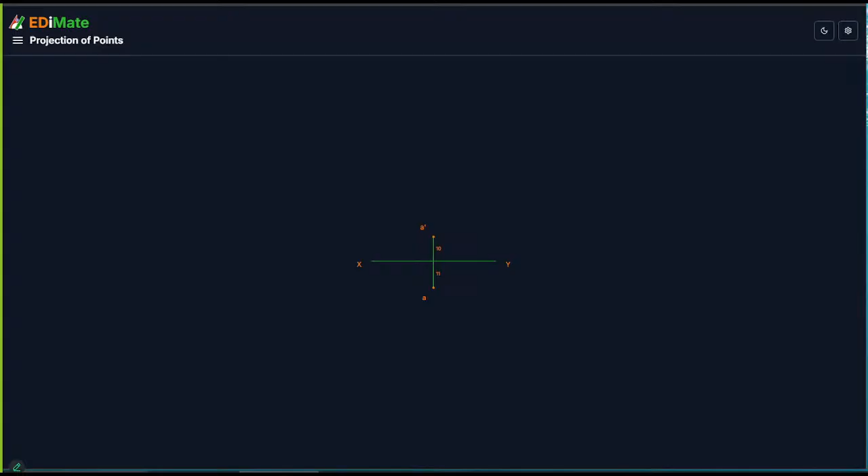There are, of course, some things which I'm yet to add. It's still a work in progress. Let us start with points, I think that would be the right place to start. You can see this is the projection of points. There is an XY line, and the front and top view of a point A has been shown here.

When we click on the top right side, which is a setting button, it will open a side panel which shows the controls with which we can change the values for this view. Suppose we want to change its distance from HP, we just have to slide this slider, and you can see in real time in the graphical solution the front view rising above the XY line.

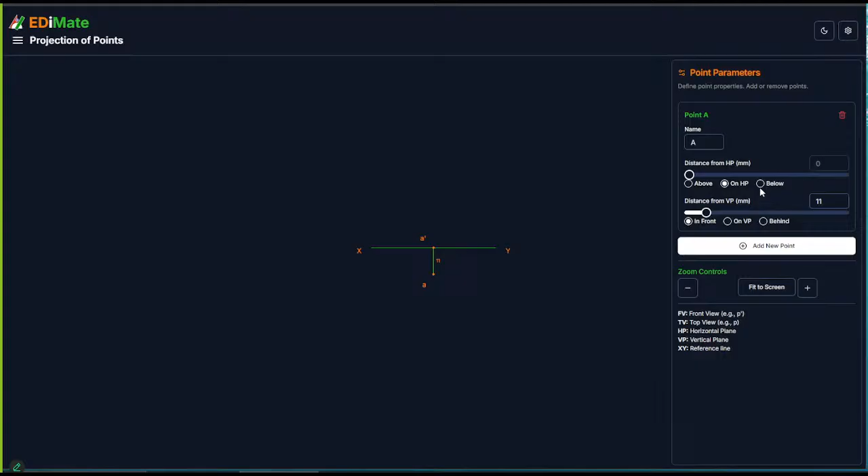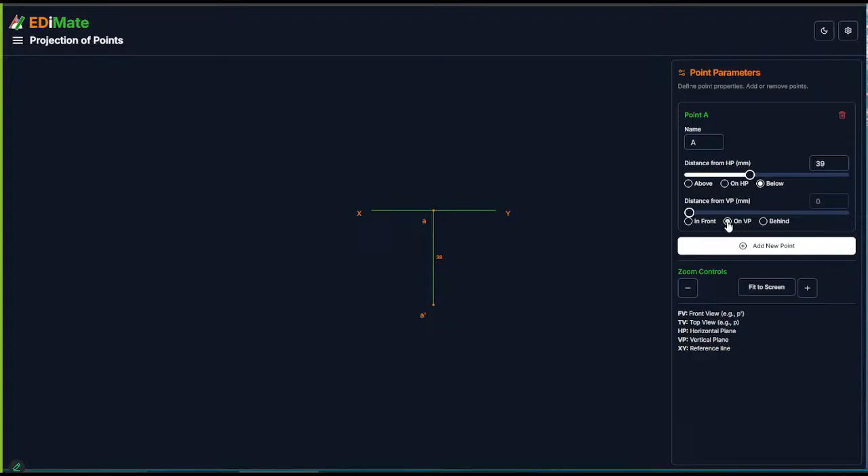If you want the point to be on HP, you can just click on this point and see the change happen instantaneously in the diagram. You can also place the point below the HP, at whatever distance you want. Same way, there is another slider which helps change the distance from VP. It can be in front, behind, or on VP, and all these changes we can do.

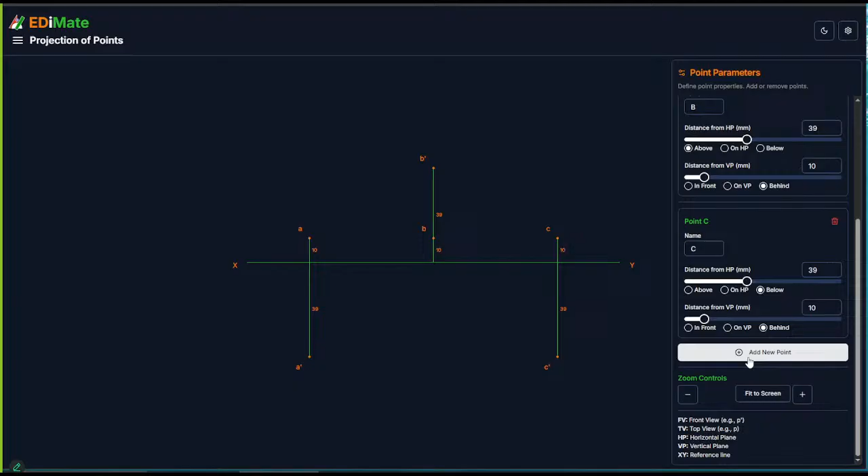If we want to compare the points side by side, we have an option here to add extra points. You can see another extra point has been added here, and I can keep adding points. Each point will appear with a different name - first point is A, second point B, third point C, and so on. I can keep changing the quadrants where the point is located and checking how any change in these dimensions will affect the point.

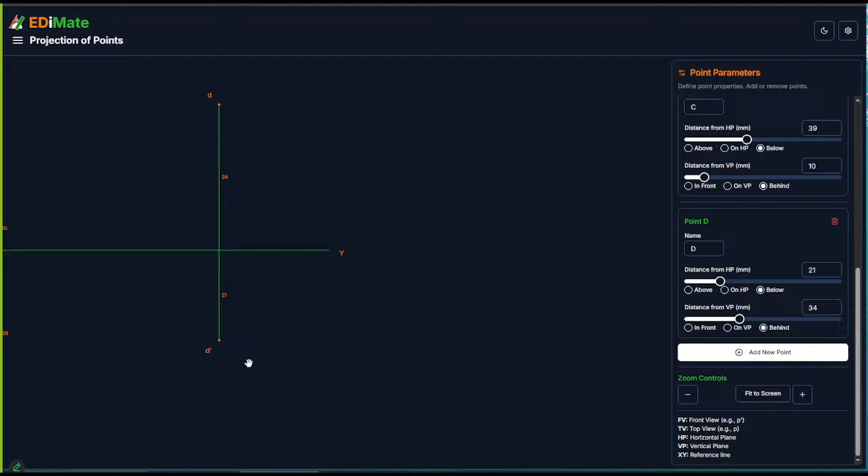So this is what we have here in points. At the same time, we have options here for zooming in and zooming out. If we click on the plus sign, we can zoom in and check one particular point in more detail. We can move this point aside and go around and check out all these points.

This is how the app has been designed. After the points, we have projection of lines. Projection of lines is where students feel maximum difficulty because there are a lot of different terminology to be used here. So in order to help them identify the different objects and lines, there is a click button pop-up based feature here.

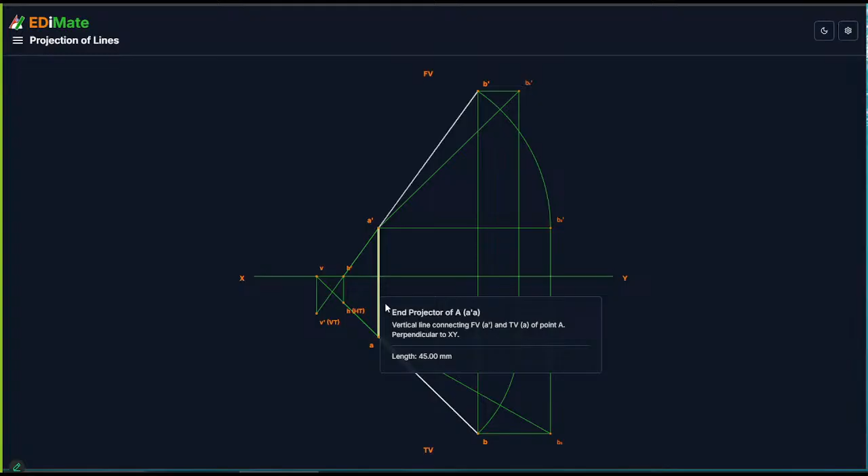When they click on a particular line they want to learn about, the line gets highlighted and a pop-up appears showing what that line is. First it shows the name of the line and how it is represented, B dash B, you can see, along with a short description of what that line is. It will also show the length of that line after it has been drawn.

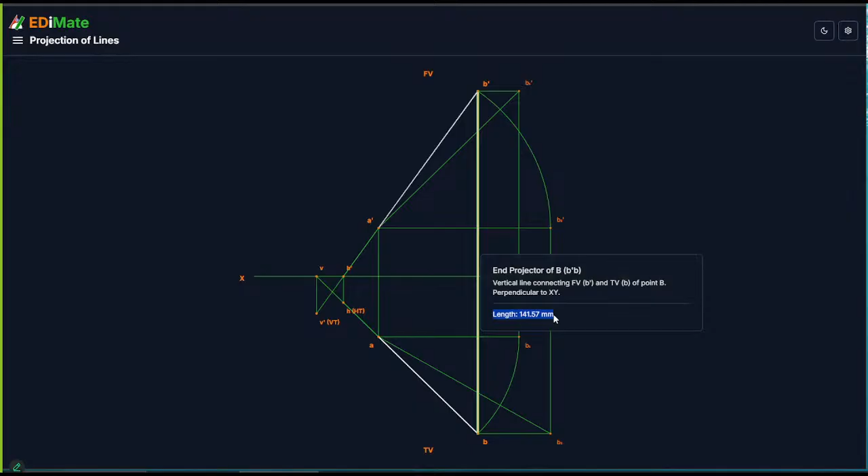This information can be used by the educators, the teachers, the lecturers who are giving assignments to students. Once they give a question with a different length and angle, the students will be able to draw it, and the teacher will be able to verify whether the diagram is correct by just checking a particular length.

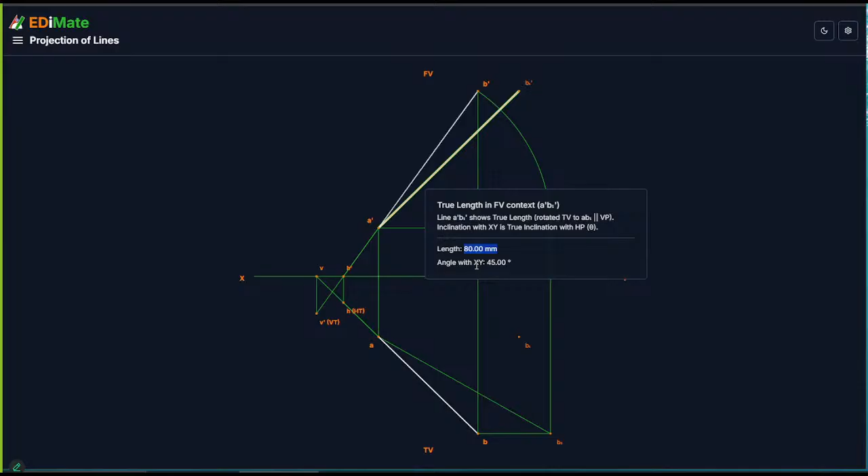It can measure all the lengths: the end projector first, end projector second, the front, the final front view, the final top view, the temporary top view at true inclination, and the temporary front view at true inclination. For all these points, pop-ups have been added which the student can use to understand what it is, what length it is, at what angle it is, and so on.

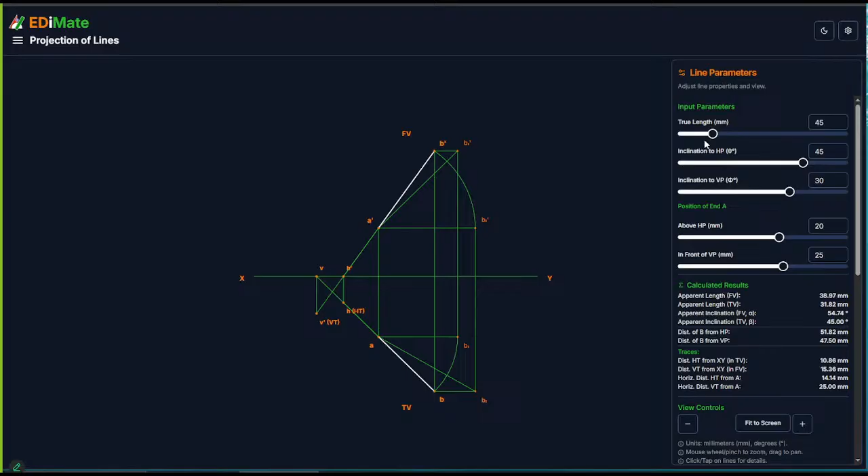If he clicks on the setting button on the top right, he will get the option to change the values. Right now I'm changing the true length, and you can see the changes happening in real time on the screen.

As soon as that happens, as soon as I'm done doing that, I just have to give it a small time and it will zoom back to show the complete diagram on the screen. So this is how it has been designed.

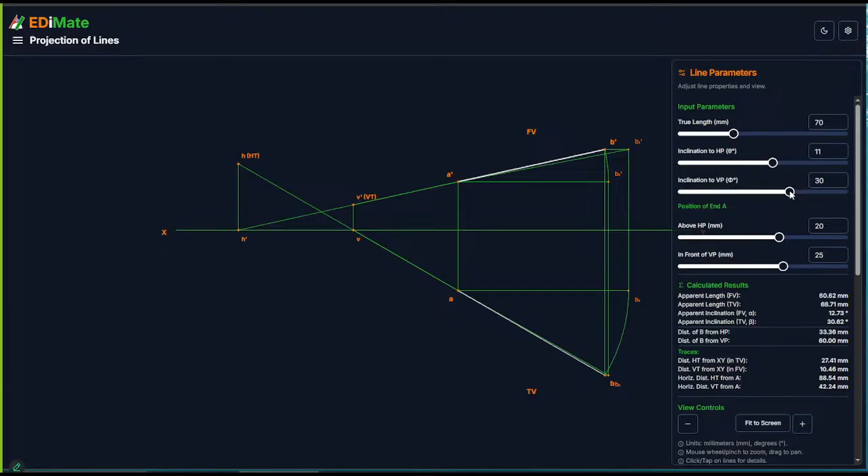You can also check the angle of the front view, the angle of inclination with HP, and it will zoom back to show the complete image. You can also change the angle with VP.

At any point, if the angle crosses a particular value and the sum of those angles becomes invalid, an error comes up at the top telling us that these particular angles are not possible. So the error handling also has been taken care of.

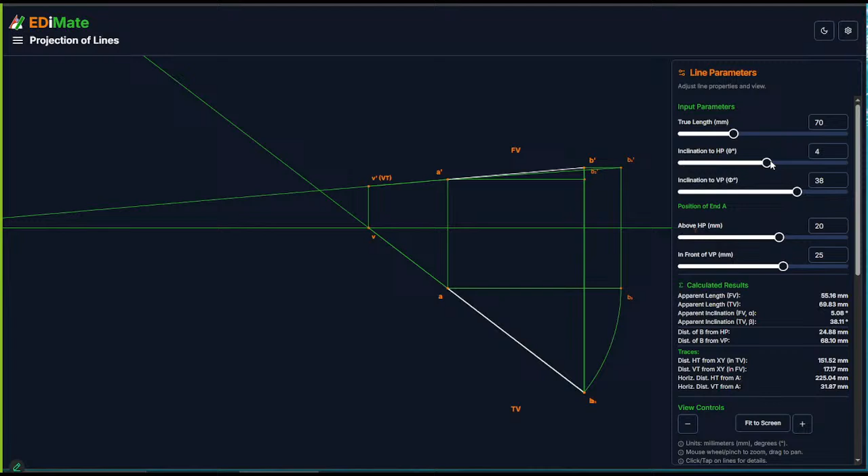This will enable a lecturer to give different values of problems for each student uniquely. Earlier, what used to happen is we just used to give a single problem with the same inputs for all the students, and one student used to solve it while all others would just copy paste it. So by doing this, majority of the students will not learn the subject.

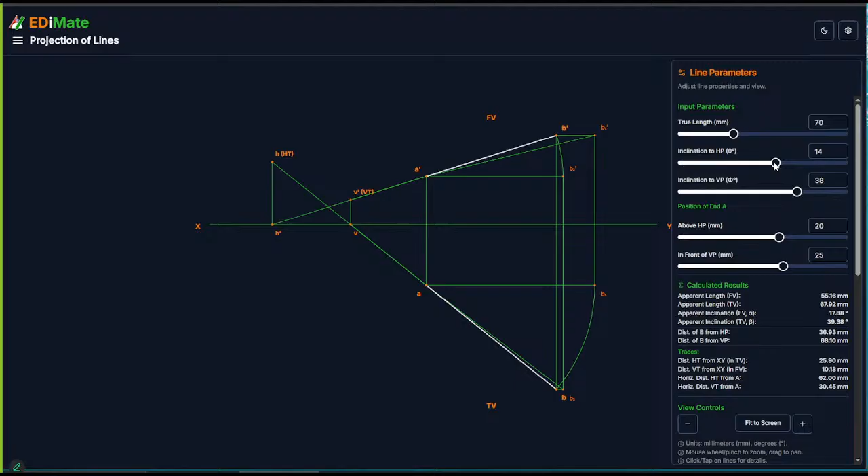So this app, I think, will be helpful to the lecturers in seeing a lot of different variations of the problems. Once the lecturer has so many variations, the students will be discouraged from copying stuff from others, and they will be more encouraged, more inclined towards learning it themselves.

Because only when they have understood it and learnt it will they be able to solve this problem, and only then will they be able to correctly get the value of the answers. So this is the thing.

Now, in projection of lines, we have solved only one particular scenario wherein the inclination with HP and VP are given. So we are trying to improve the application in such a way that it will be able to accept any of the five variables - it could be inclination with HP as it is right now, it could be the final front view length and final top view length, and it could be many other things like that. So I think this is what we have.

So can you share your opinion about this? Have you taught this subject earlier, the engineering graphics? Yes, yes.

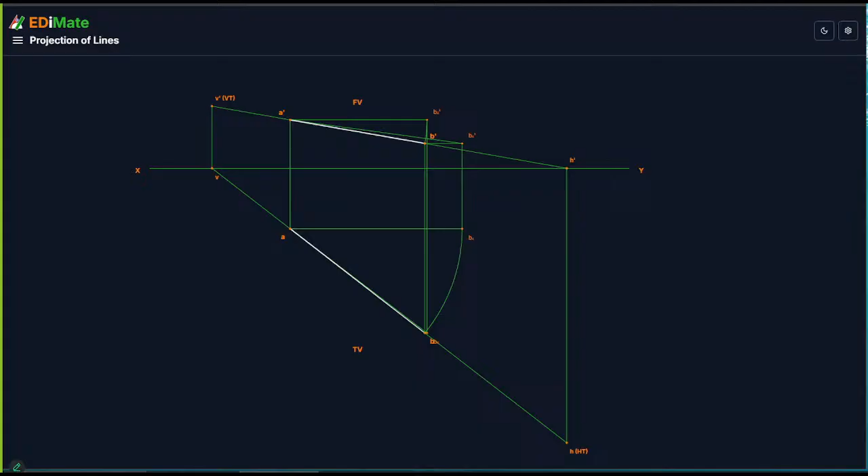Now, actually, in this case, at least give one example with the dimensions and angles. Give the dimension and angle and solve one problem. You want the dimensions to appear on the screen, or?

Yes. And first you should show them how they do it on the drawing board. Okay, meaning step by step - first what is to be drawn, next what is to be drawn. First show on the drawing board how to do it, then this application.

I didn't understand your question, sir. See, earlier when AutoCAD was not there, people physically drew it on the drawing board, on a drawing sheet, no? Yes, sir. That engineering drawing practice was stopped.

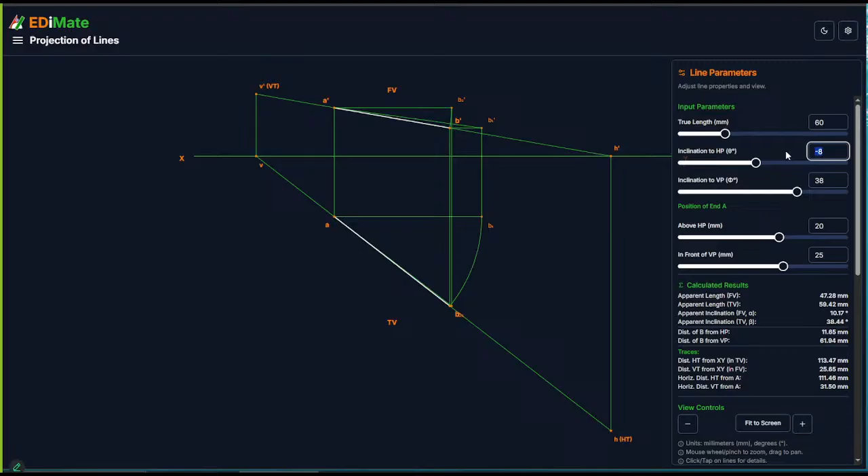And then this AutoCAD has come. So first, how to do that - what is that angle and size? Give the angle, size, both angles and the size of the front view on the vertical plane. Then how to do it? The first figure, whatever is given, that one you give it with the angles and all that.

So one solves the example with the angles and size. Actually, the solution is happening in real time. Now, whatever values you are changing, it will appear on the screen. That's what you are doing.

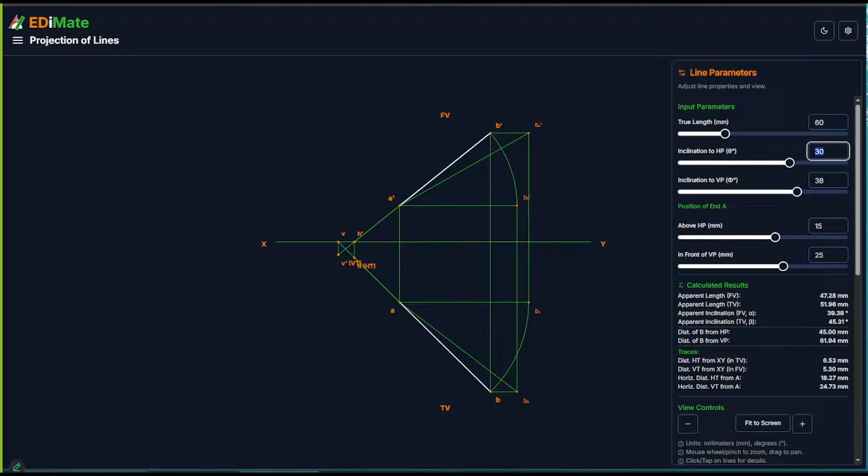One problem, sir, at least you solve it. Okay, let's take an example. The length is 100 mm, sir. Inclination with HP, let us say it is 30 degrees, and inclination with VP is 45 degrees. The distance of a point A from HP, let us say it is 10 mm, and distance of the same point from VP, let us say it is 25 mm. So these are the 5 inputs that will be given to the student in the question.

Now, as soon as the student fills these values here, the solution to that problem will instantaneously appear on the screen. Okay, that I agree. But at least how to draw this curve? How to draw these curves? Yeah, those things we have to add.

So first the plan fundamental - this is quite useful for people who already know the subject. Suppose when somebody is starting the drawing practice, who doesn't know what is engineering drawing, engineering graphics - for such problems, we have our YouTube channel, sir, on which in detail we have explained everything.

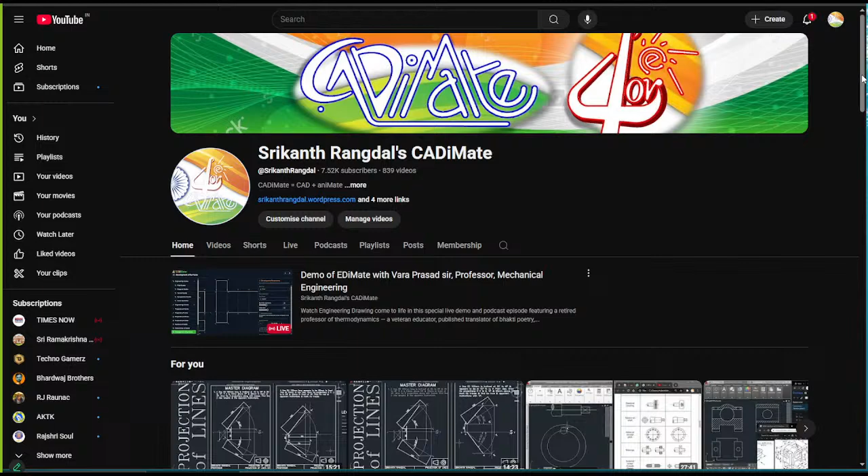Okay, this is the YouTube channel, and most of them have been solved by using AutoCAD. Initially I tried to solve it using engineering drawing manual board also, but there are very few on that because I didn't have a good quality camera with me. So there are very few of that type, but a lot of problems have been solved in AutoCAD.

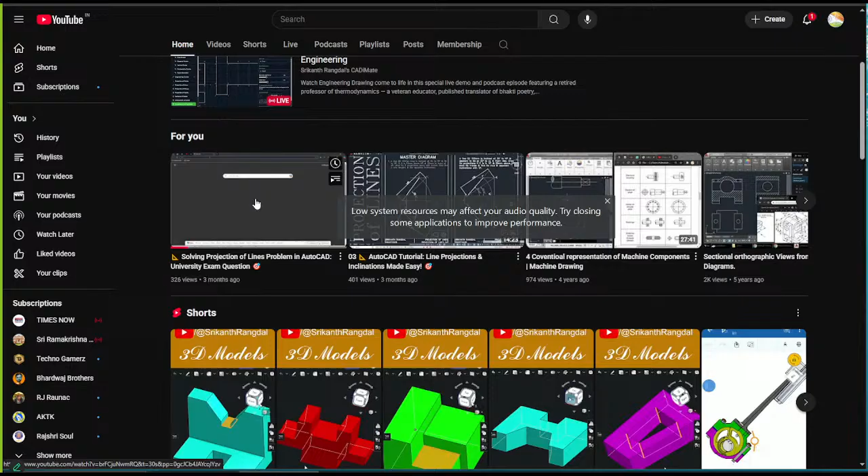This is a sort of practice by changing the angles and the size. So with this they can learn how to draw, what are the steps to complete the diagram, and the tools to be used for completing the diagram. And by coming here, they will be able to check how, by varying what value, what thing will change in the diagram.

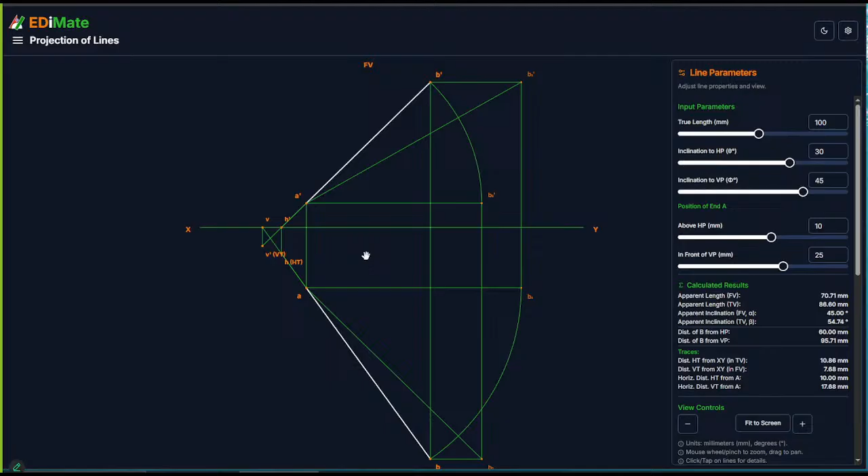Okay, that can be mentioned in your talk - you can say how to do it manually is given in so and so place. Yes sir, so those tabs will be added, like for example for engineering scales, there's a page added for videos also.

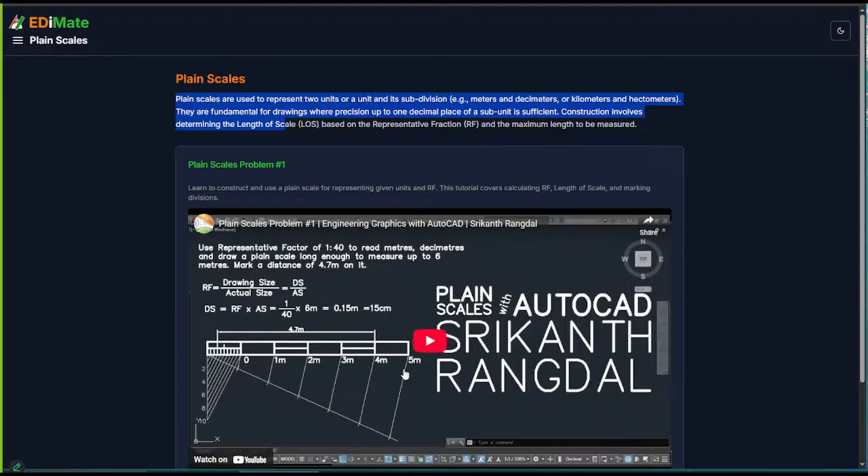It will take some time to load, sir. So this is the page - engineering scales, a brief explanation about what it is, and there is a video link. So when the student clicks on it, the video starts playing, showing how the scale looks. So these things, I think, will be helpful to students who don't know anything from scratch.

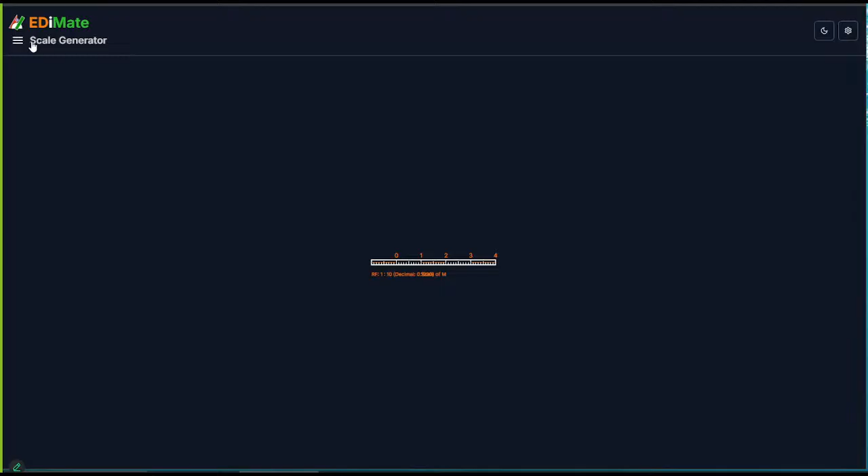And once they know enough, they can come to this simulator and play around with it to check how different values are affecting the diagram. Okay, understood.

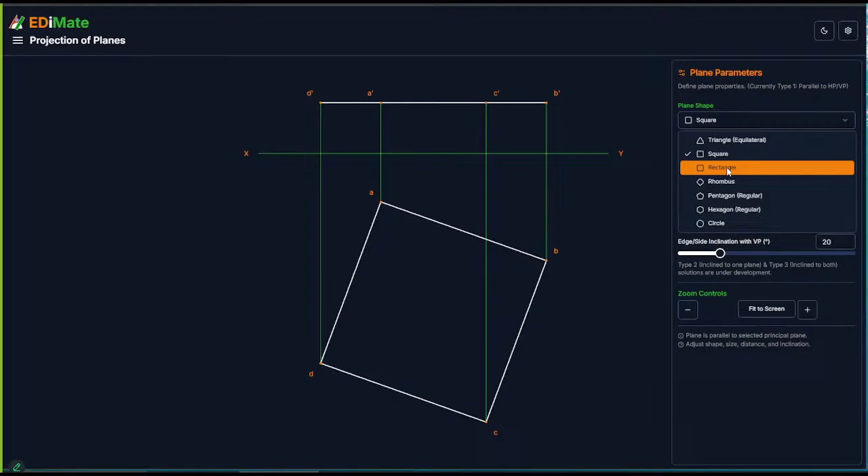So we also have projection of planes. In the planes, again, they can change the length, they can change the distance of the front view, they can rotate the top views at what angle they want, and accordingly the front view and top view both are going to show the changes. They can also choose different diagrams like rectangle with different length, width, and so on - rhombus, pentagon, hexagon, circle. So all these different types of planes they can select and check out.

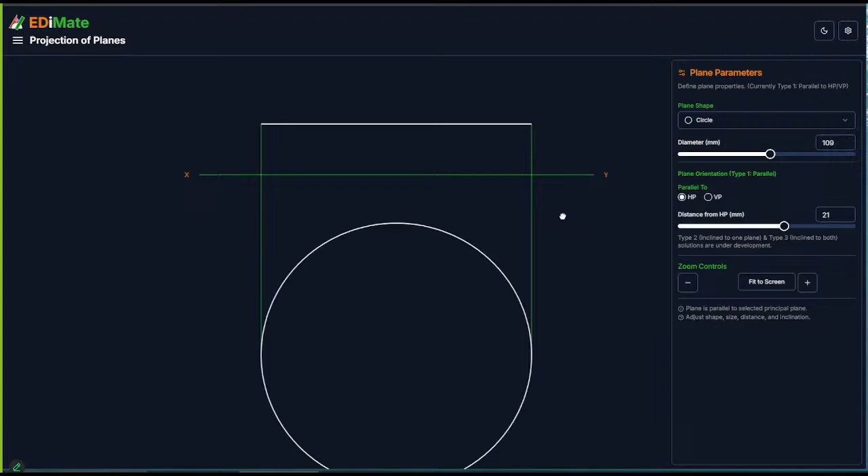The two-step problem, we are still working on it. The logic required for that is a bit complicated, we are still trying to find a solution to that.

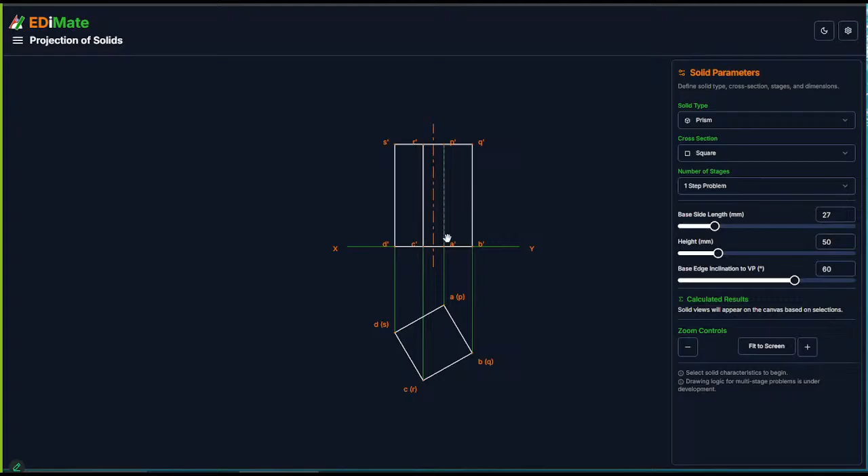Then coming over to solids, here again we have different types of solids listed in the first option. The students can play around with the base length, the height of the prism, and they can also change the rotation angle of the base to whatever angle they want. And in real time, they'll be able to see which line remains hidden and which line remains visible.

They can also choose different shapes. We have pentagon, hexagon, and all other shapes available.

So this is working perfectly for the first position, wherein the solid is resting with its base on HP. For inclination, we are still working on that logic. When that is obtained, we may add that as well to this.

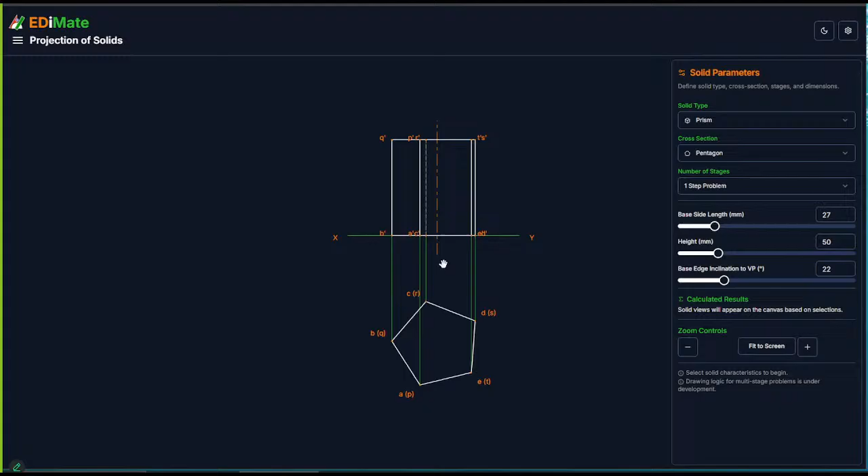Sections of solids was the toughest, I would say, for developing this, because it involves generating the sectional top view also. We have still not figured out how to get the true shape of the section, but most of the other things we are able to get.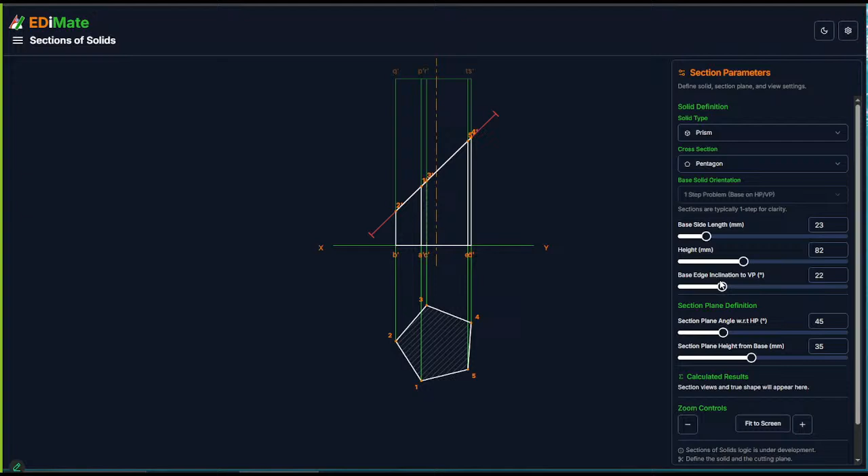So we can adjust the base length, height of the prism, and the inclination of the base. Then for the section plane, we can adjust the angle at which it is cut.

The plane may cut the top and bottom also together. Then we can adjust the height of this section plane as well. And in real time, you can see the changes are taking place. It's after all the changes are made.

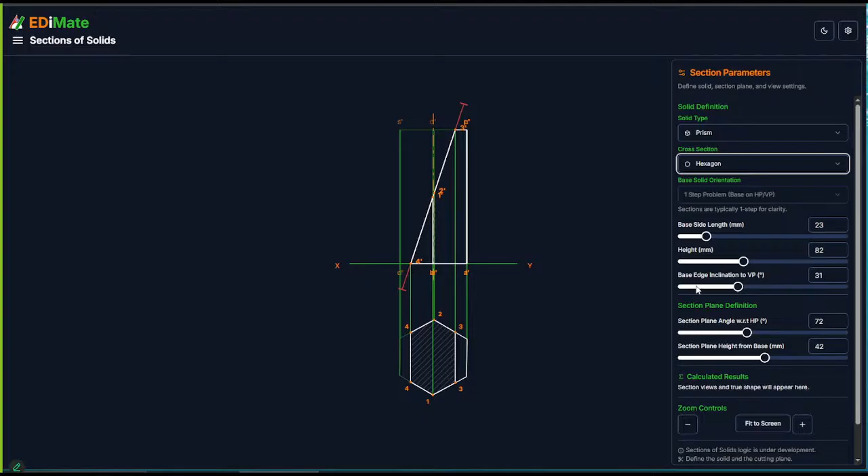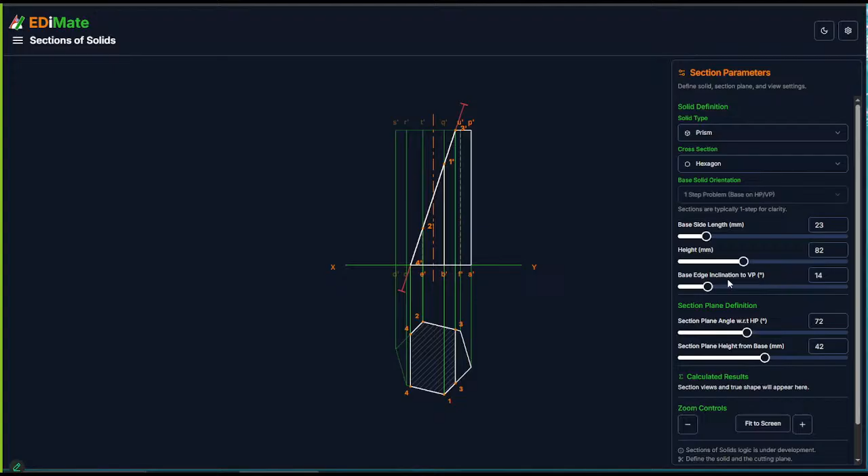So while teaching the subject, students at most can solve one or two problems in the class. And yes, with this limited number of problems that they solve, they will not be able to get a complete idea about how the figure changes if the values are different. So with this application, they will be able to get that idea completely.

So for any change, are you giving the values there? For sections of solids, we have not added it, sir. In projection of lines, you must have seen, we get the values - we get the lengths, we get the angles. All these are possible for lines. For this, we are yet to add.

Here whatever you have shown is when the section is there and hatching is given here. Yes, we are showing it. But at what angle it is cutting and all that, that is not there.

Presently here, we have not shown it on the screen, but when this angle, say I'm changing it to 30 degrees, it will reflect here on the screen. We just need to show it graphically here. That is something we are still working on, maybe on the keyboard it must be working.

Yeah, they can enter it from the keyboard. If they click here, they will be able to enter with the keyboard. They can also slide it continuously, and the angle will keep changing.

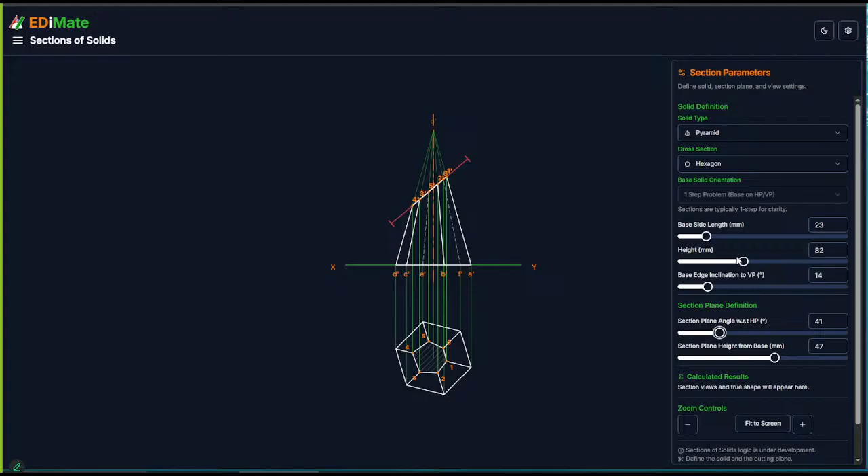That's about the sections of solids. Intersection, I'm still working on it, sir. I'm yet to figure out how to build the logic for it.

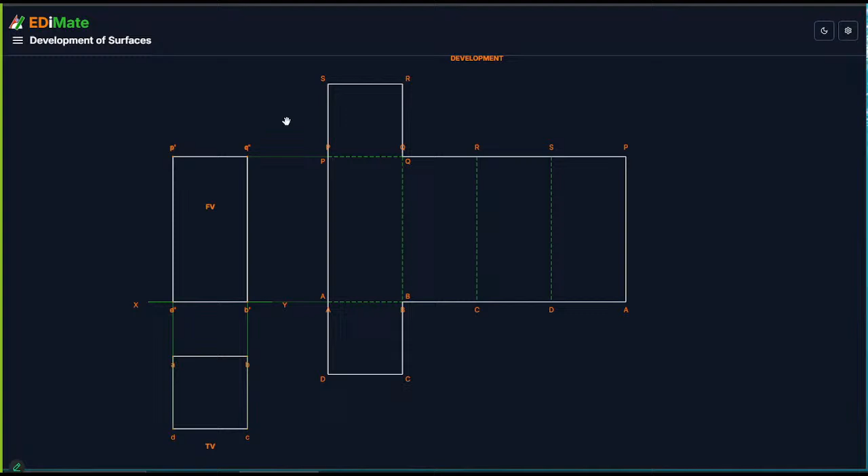And for development of surfaces, we were able to get only for prism as of now. Different shapes, whatever we can choose, they will appear, and complete prisms, they'll be able to open up.

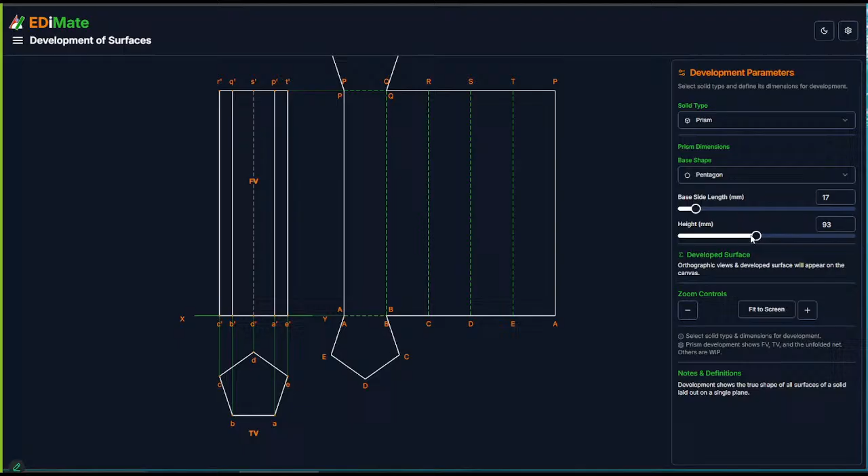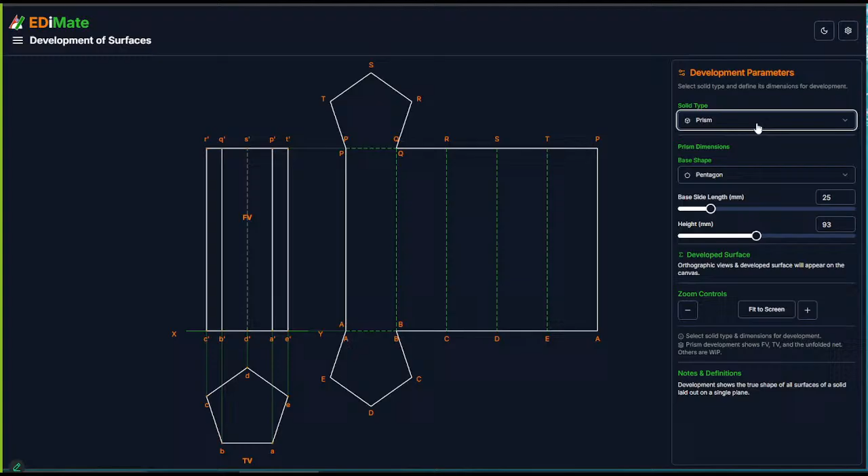Again, we can change the base side length, height - all these parameters they can change, and in real time, we can see the changes are getting affected in the diagram. So we are still working on taking a section of this, and also on other options like pyramid and other stuff. So once that is also done, I think development will also be a good topic.

So presently, what is the syllabus presently in engineering colleges? Not sure, sir.

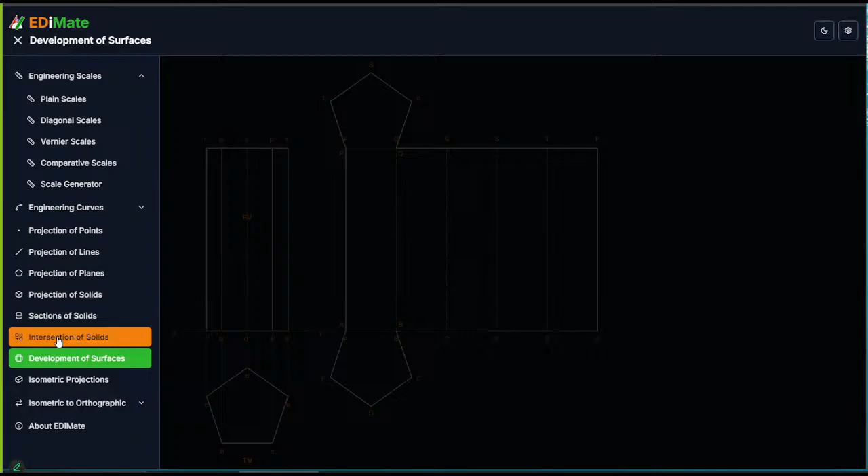I think intersection of solids is not there anyway because recently, normal drawing is stopped and AutoCAD has been started. Yes, sir. In that, I think in AutoCAD also I have seen some files - only they are telling some lines and planes. Not much they are showing. Very simple problems.

Actually, there were very difficult problems in the actual engineering graphics. But now, whatever they are teaching - when I left some 4 or 5 years back, I've seen only very, very small plane or a rectangle, something like that, circle like that. Yeah, there is a reason for it - small things. So again, the same thing.

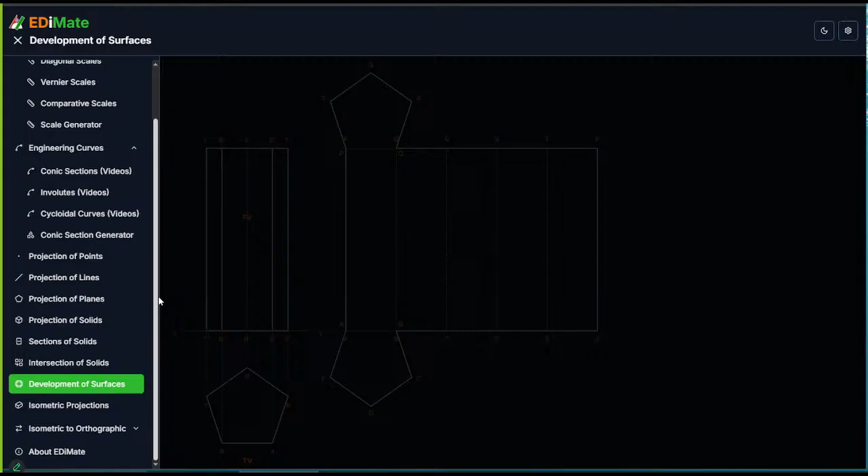That is again one of the other reasons why I thought of building this app. The students get very limited time in the lab, and in that time, they not only have to learn this software and AutoCAD, but computers may be less also - they have to learn about computers, then they have to learn how using the computers they have to solve the problems.

So many of the students - actually, the introduction of AutoCAD has become fast. I think unnecessarily they have introduced it, took up a lot of time, stopping the actual manual practice of graphics. But sir, if you see from an industry point of view, the software knowledge has become very essential.

This is something which cannot be paused, yes. But nowadays, this is the main disadvantage as well - yes, this is the main thing, the disadvantage now. So I think this app will connect to a more variety of problems in less amount of time. That is the one thing where it can help.

This is okay. So, and I think, sir, anything else you made?

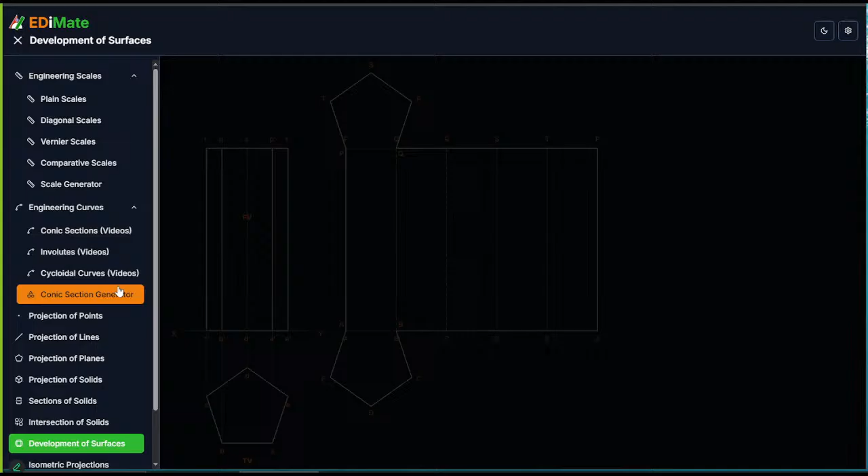Right now I'm working on this app only, but there's a lot of other work I had done when I was teaching. In this particular app, I think I haven't shown you this one. Let me show this and we can talk about other stuff.

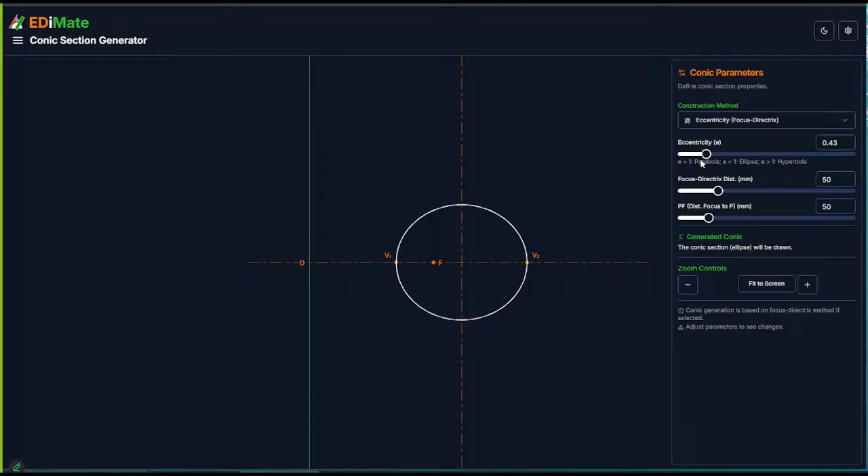So this is an ellipse, and when we start changing the eccentricity value, it stays an ellipse. When the eccentricity reaches 1, it becomes a parabola, and when it crosses 1 further, it becomes a hyperbola.

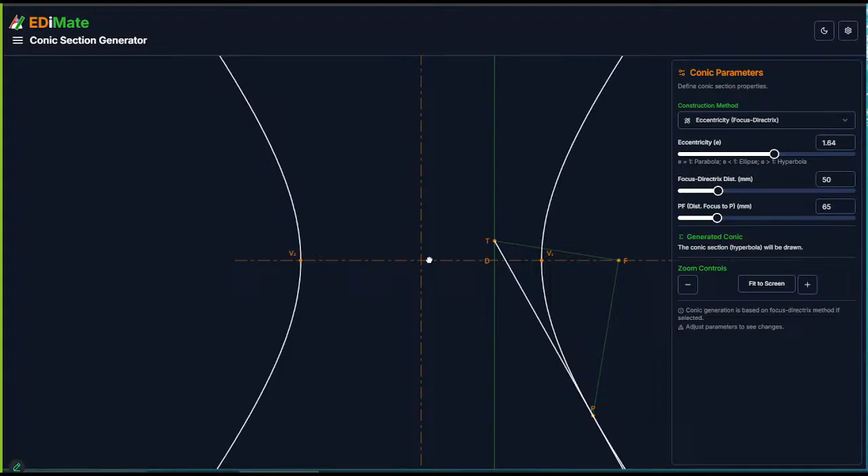And for the tangent value, when we adjust the distance of point P from the focus, see how the tangent is formed. So for ellipse also, they can see the tangent formed at different places, at different distances.

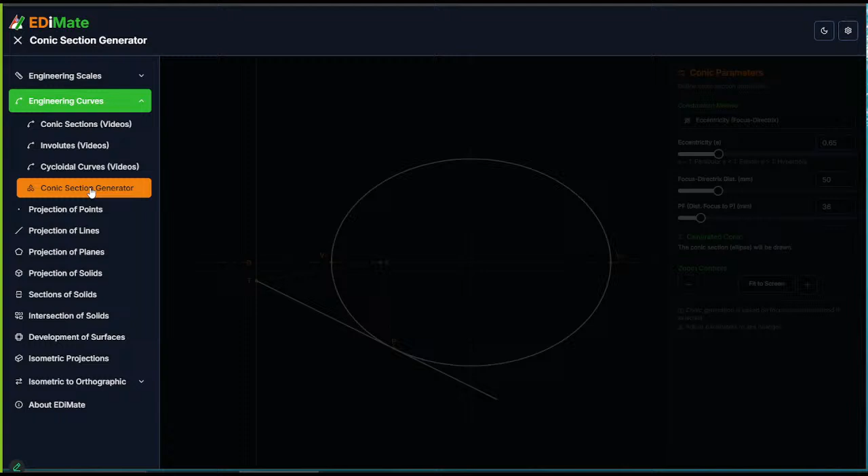For the conics and other stuff, I mean for cycloids and involutes, we are still working. There was a very good code I had.

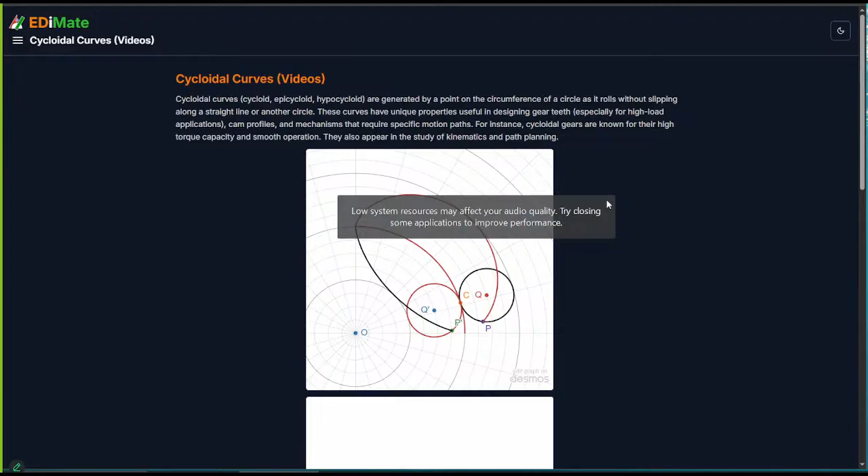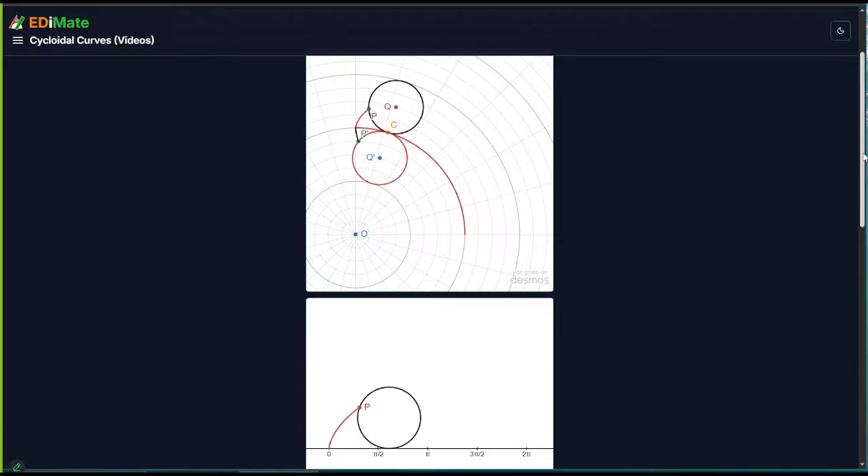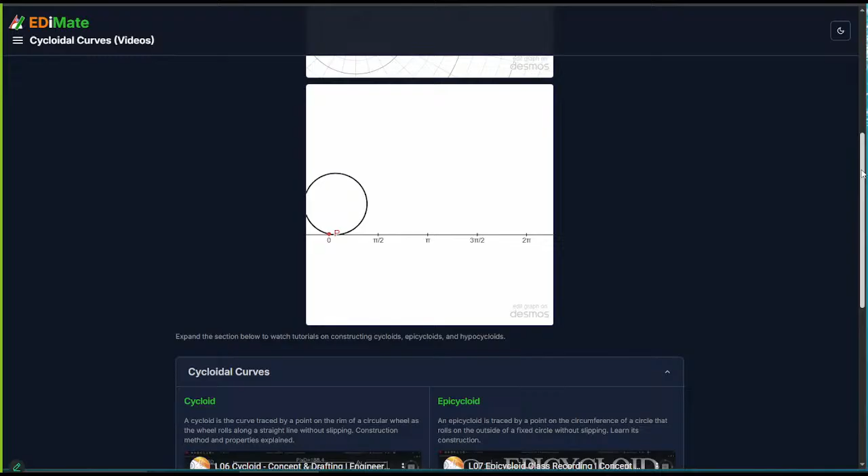So this comes a cycloid. And below we have some videos which explain in detail, step by step, how to create these cycloids.

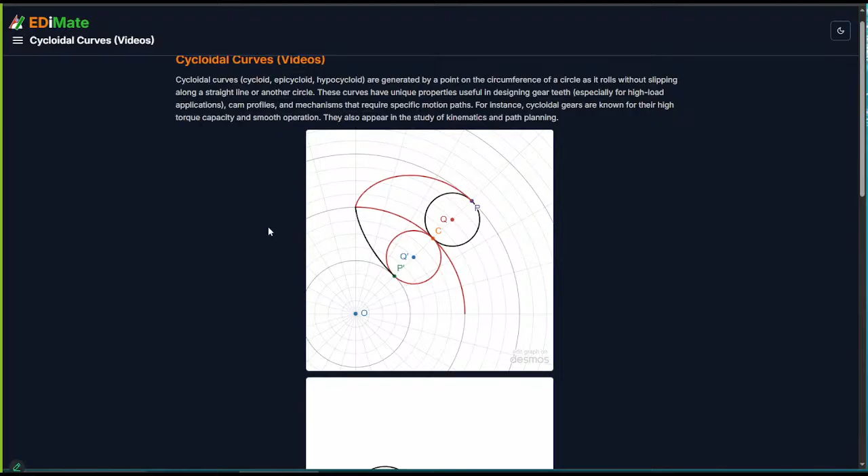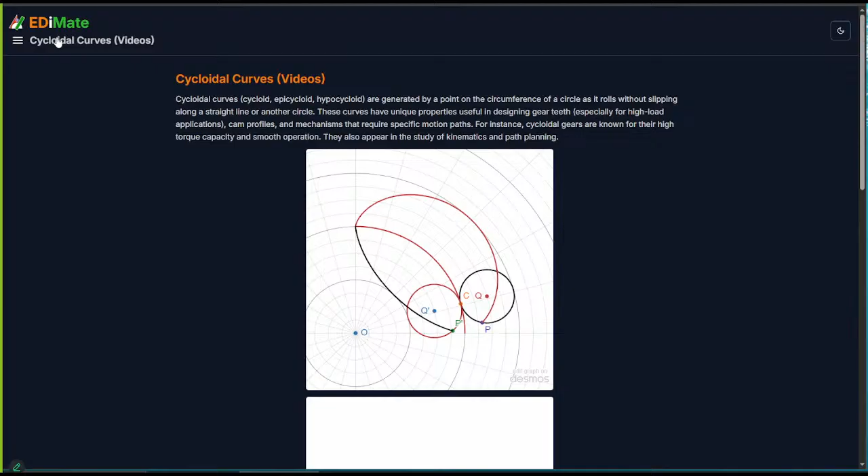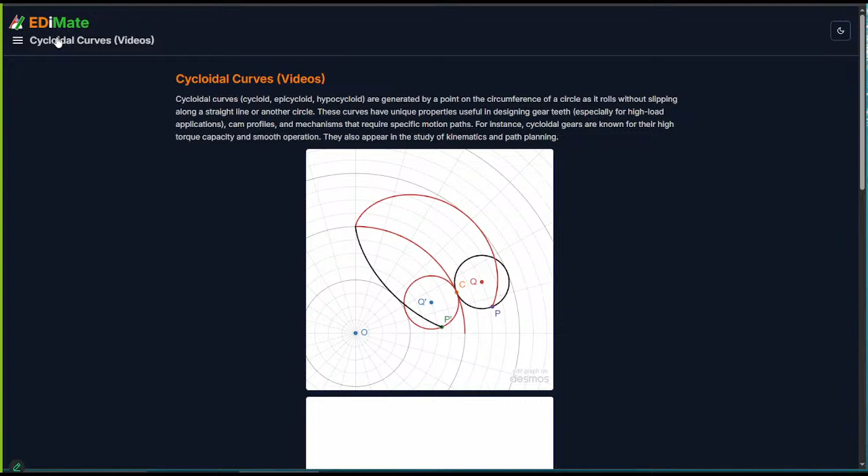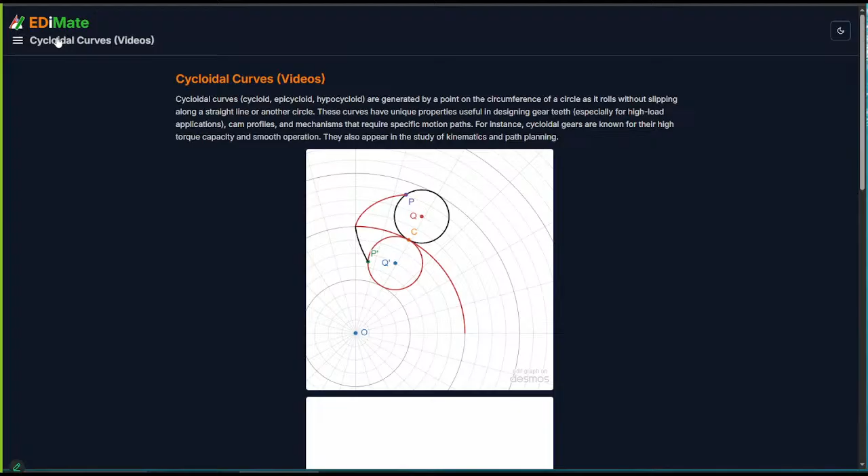So yeah, here also at least one problem you solve, and by changing these things, something will happen.

That is the plan. I plan to add animations to this, so that once a particular value has been set, and when the student or teacher taps on a play button, it starts animating to show the step-by-step explanation as well as the animation on how the drawing is supposed to be generated.

So I think that part will take time, sir, because I'm not from a coding background, and I'm trying my best to do it in whatever spare time I have. You're doing good work actually.

Are you working anywhere now, or doing this? I'm working at Adroitech Solutions, and we develop technical manuals for companies. I'm not supposed to tell you for whom we're doing it right now, but many good companies in electric bikes and other products. So we develop service manuals which explain with illustrations how to take a product apart, do the maintenance work, repair work in it, and how to assemble it back.